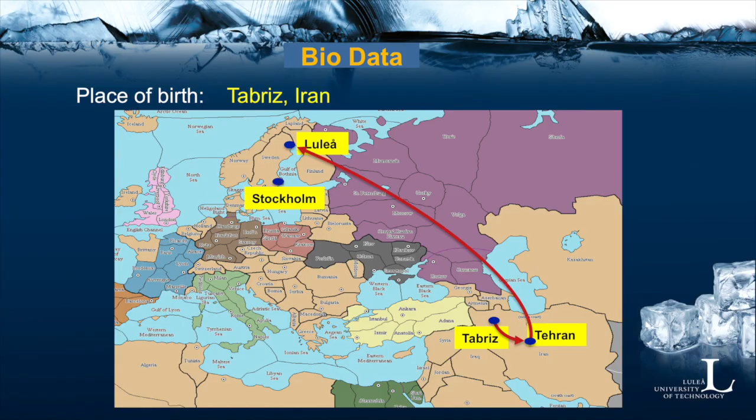Of course, I'm male. I'm married. My wife, Saide, she's present here, and she's a teacher in the Luleå schools. I have one son, Shayan, 23 years old. He is a student at Umeå University. And I have one daughter, close to 13 years old, and she is in Porsöskolan. You can see all of us in this picture. This is from the hat ceremony this year, the latest picture we have. My wife, Saide, my son, and his roommate, and this is my daughter, Shania.

About my academic qualifications, I am now in the position of professor, holding that position since January 2018. Before that, I was associate professor from 2011. Before that, I went to Toronto and did my postdoc at the University of Toronto for 2 years after my PhD, which I got in 2005. I have a master's degree from the University of Tehran Faculty of Engineering, which I got in 1993.

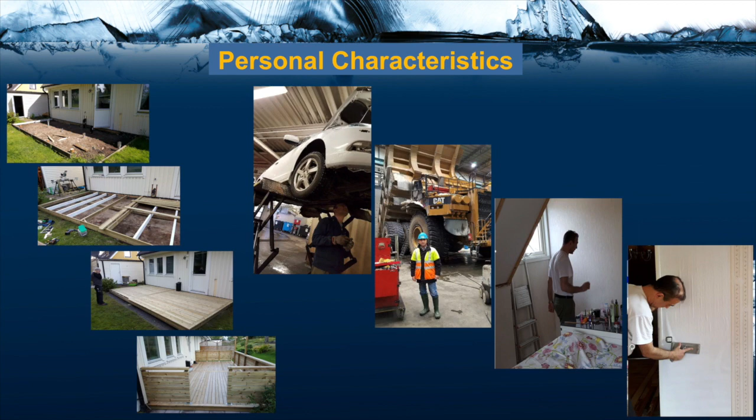Here I'm doing some repair and service on my own car. Whenever we go for a field visit, my first choice at any opportunity is to go to the workshop and see what people are doing there, in the mining area. And also, as you see, fixing things at home.

Here I'm changing wallpaper and building one new room in my house.

As for my personal characteristics, I'm a social and easygoing person - it's not only my claim, my friends also say this. I always think positively, I'm an optimist, because being pessimistic only causes suffering, while being optimistic gives you positive energy to go ahead and move further. I also enjoy helping people and making them happy.

Even if you ask my friends, hopefully they will confirm that I am a helpful man. I'm helping them. I don't like lying and I hate it. I believe in being simple and transparent. As they say, walk the talk. I'm trying to do this, I'm walking the talk.

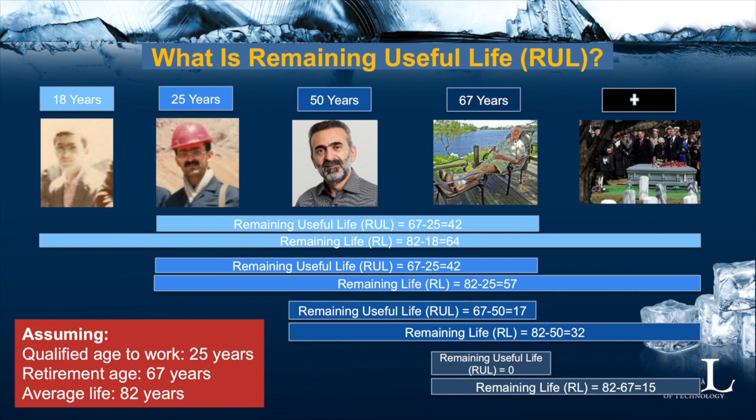When I get retired, my remaining useful life becomes 0, but I still have some life left - this is the scrap value. When one of your machines is getting old and you're not able to use it, or it's failing very frequently, you can scrap it, but you will still get some money for your machine when you scrap it. That's the remaining life, but the useful life is 0.

I don't look back at where I started. Now I estimate my remaining useful life from this time, this second. But sometimes the remaining useful life is less.

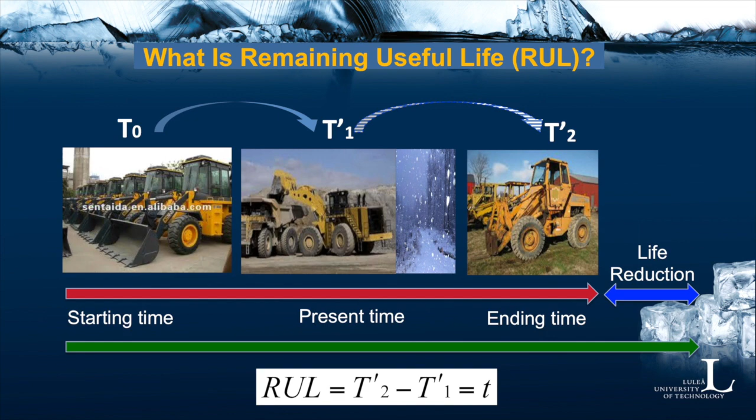Remaining useful life is now different than the previous case, which had no external factor. Remaining useful life is a random variable. It says how long my system is going to survive from now. It is a function of time and some other factor, an external factor, as I said.

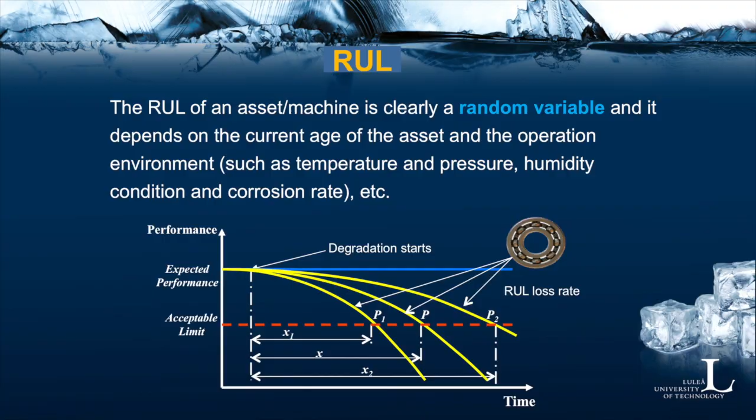But if I lubricate it, take care of the ball bearing and service it on time, I can prolong its life this much, meaning my remaining useful life will increase. The middle curve is normal. The left one is when there's a harsh condition. The right one is when I'm taking care, servicing, lubricating the ball bearing, which prolongs the remaining useful life.

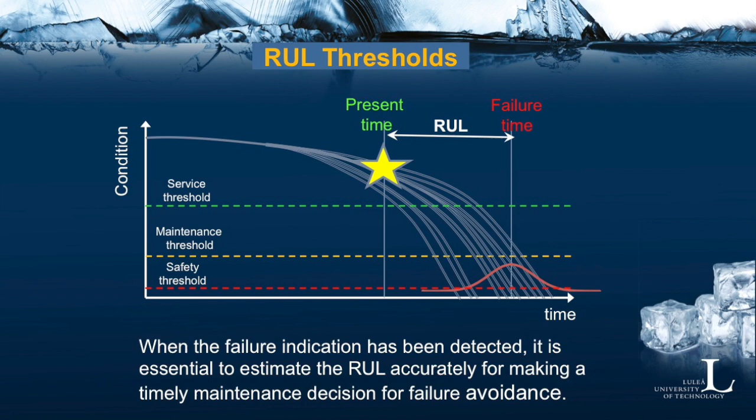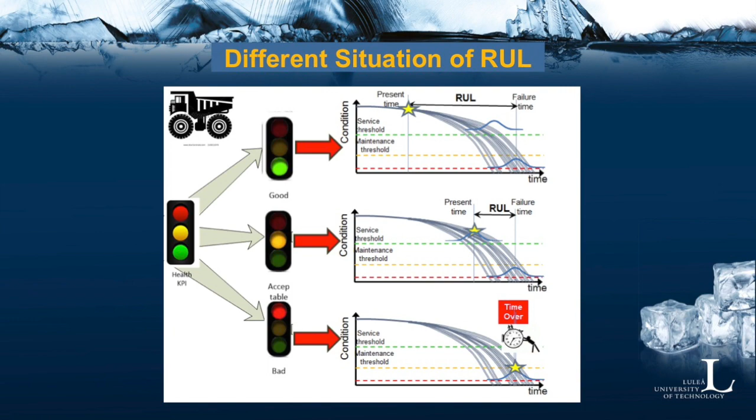If I don't do that, I will reach this level, where my machine will fail, and this is the catastrophe. I can define three levels of survival of the machine. As long as I'm above this line, everything is under control, my light is green. When I reach the maintenance threshold, the light is yellow, giving me a warning, and I have to take action. When I reach the safety level, I am not able to use this machine anymore because I've got a failure or it's dangerous to use it.

Now, how can we estimate remaining useful life? Commonly, in general, it's estimated by the reliability function. What's reliability? Reliability is the probability that this machine or system can survive, can work, can do its defined work under given conditions for a specific point of time. As long as I'm here, my system has worked this long, I'm happy, but I want to estimate when my system is going to fail, when I'm going to get problems.

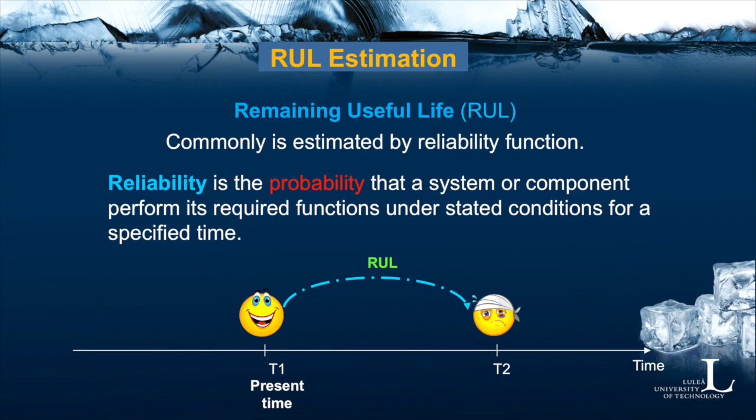This failure time can be here or can be here, it's very random, but it gets affected by different factors. If I calculate remaining useful life by reliability, I know reliability is calculated by the hazard rate. Failure rate is a measure of reliability, it's the number of failures in unit time. That's why if I have bad conditions, my machine will get failed very frequently.

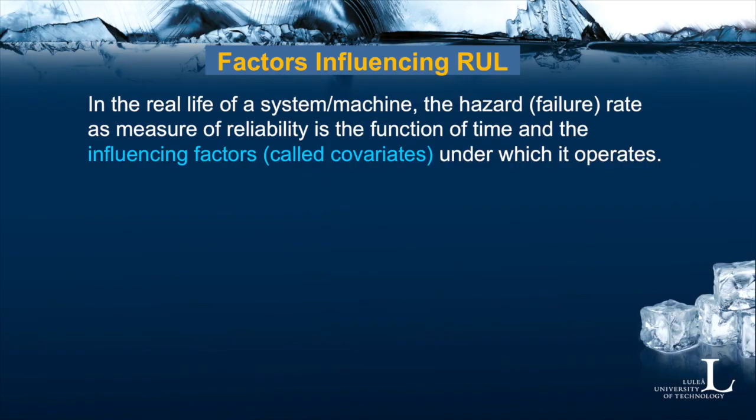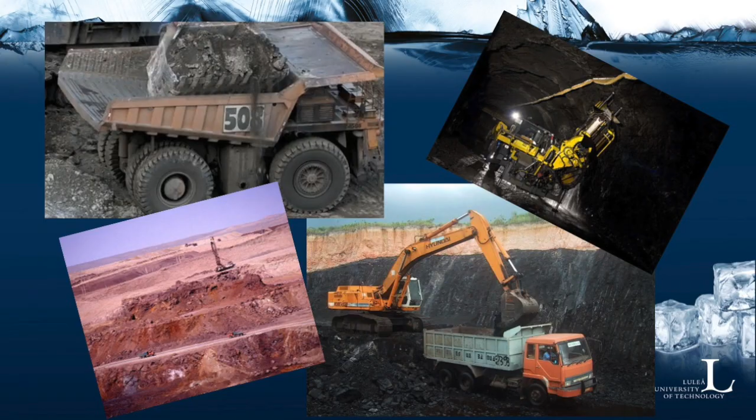I want to give you some example about how this covariate affects your remaining useful life. This example is from the mining industry. You know, mining is a really big industry, huge scale, and we have large scale, complicated machinery which is used in mining. And this is some example for loading, for hauling, for drilling, and so on.

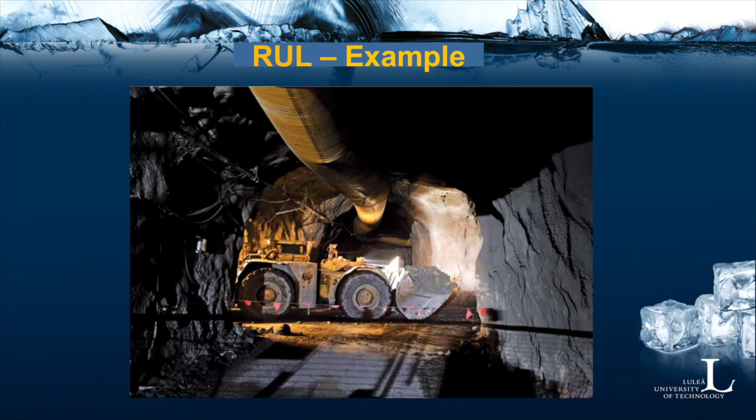As I said, this is a harsh environment. We have a lot of factors which affect the function and the reliability of the machine. The case study which we have done, I'm going to talk about, is about the LHD, load haul dump machine, which is the big loader which is used in the underground mine. One component of this LHD is a hydraulic jack. My case study was on the hydraulic jack of this machine.

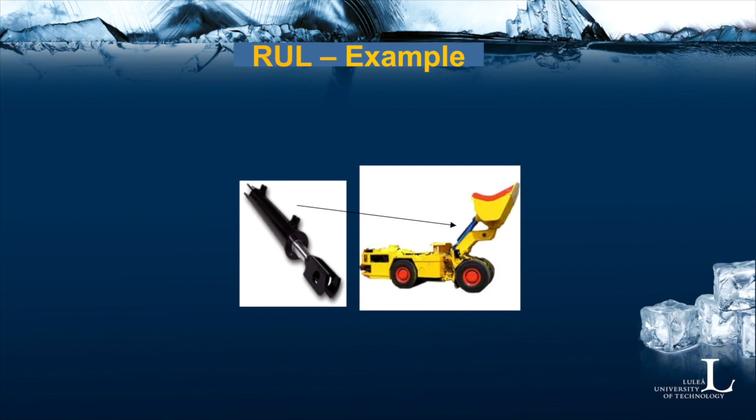I want to see how environmental factors will affect the failure of this hydraulic jack, and how can I estimate the remaining useful life of this hydraulic jack. When I was in the mine, I talked to some experts in mining. We found these 5 factors are important factors which affect my failure rate: the operator skill, maintenance crew skill, hydraulic oil quality, whether it is the manufacturer recommended or not, hydraulic system temperature, and

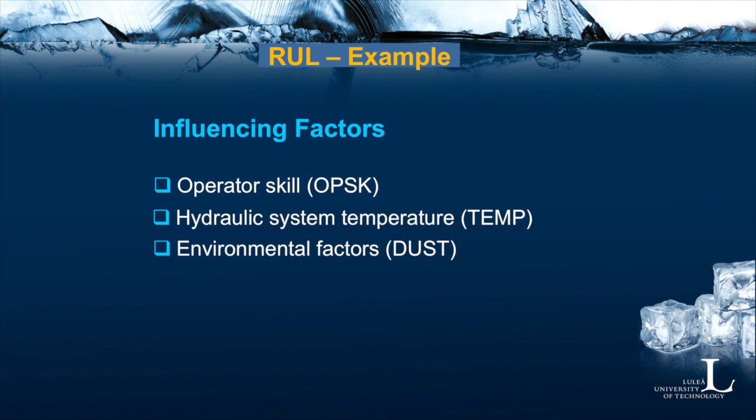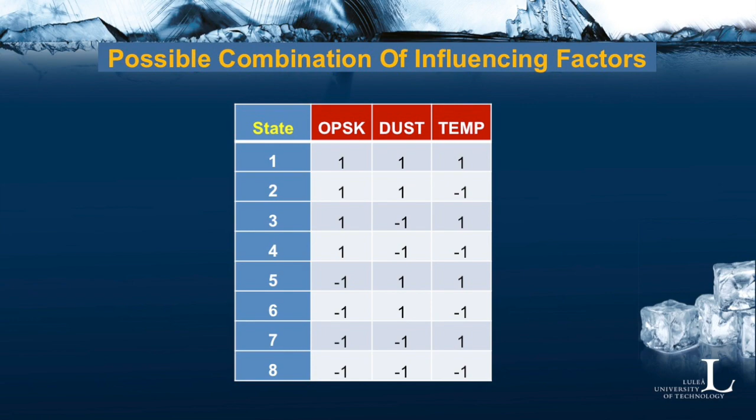These 3 factors can be combined in 8 formats. Either all of them are positive. What does it mean by positive? They are in good condition. My operator is fully skilled, I don't have any dust in the working environment, and temperature is normal, not high and not low. That's why I codified this state with the code of 1. When all covariates are in bad condition, with negative effect, I have codified with -1. The combination of these 3 factors, as I said, can be in one of these 8 situations.

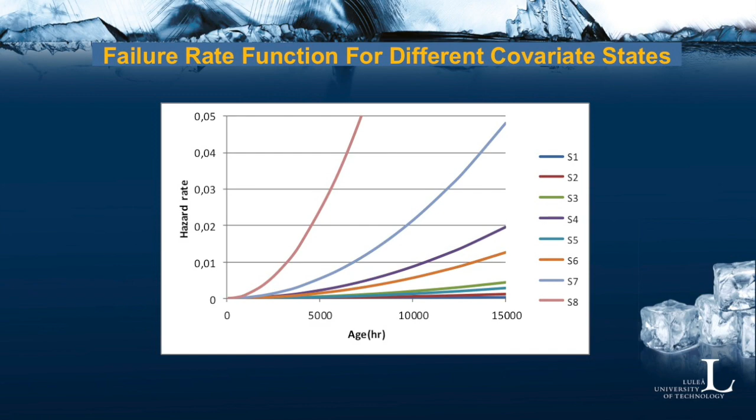If I calculate the hazard rate, I see in the worst case, when the 3 covariates have negative effect, the hazard rate is increasing exponentially. But when all are in good condition, positive, it's not increasing that much, it's almost constant. And in the cases in between these 2, you can see how it works.

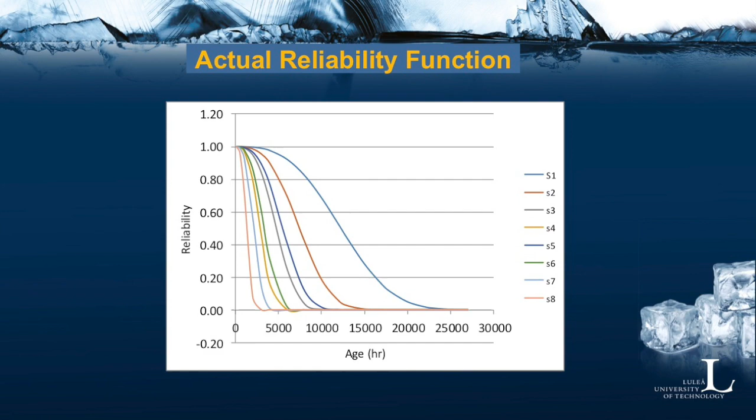And this is the reliability. As you see, reliability is decreasing very smoothly, very slowly when I have a good condition, when all covariates have positive, not negative, effect on my failure rate. And here, when all covariates are negative, you see how it sharply decreases.

And it shows the conditional reliability. It means my system has already worked for 2,000 hours. I want to know how reliable it is for the next 2,000 hours, which is up to 4,000. It tells me in the good condition, I have 98% reliability in the next 2,000 hours. My system has worked already for 2,000 hours; I'm now at 2,000. Next 2,000 hours, my reliability will be 98%. But in the bad condition situation, when all covariates are negative, it's almost zero.

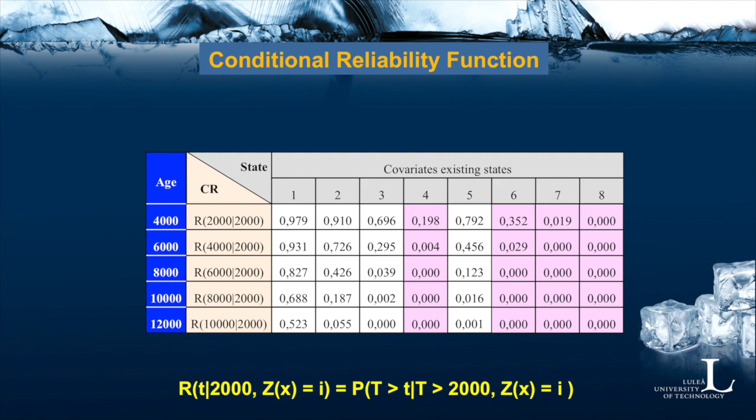And also, when the age increases, now I have worked for 2,000, for the next 4,000, 6,000 hours, what's my reliability? It's just 82%. See, as the age of the system is increasing, and also covariates getting worse, my reliability is decreasing. This is the reliability function, how it looks. In the good condition, see how it decreases, and in the bad condition, very sharply.

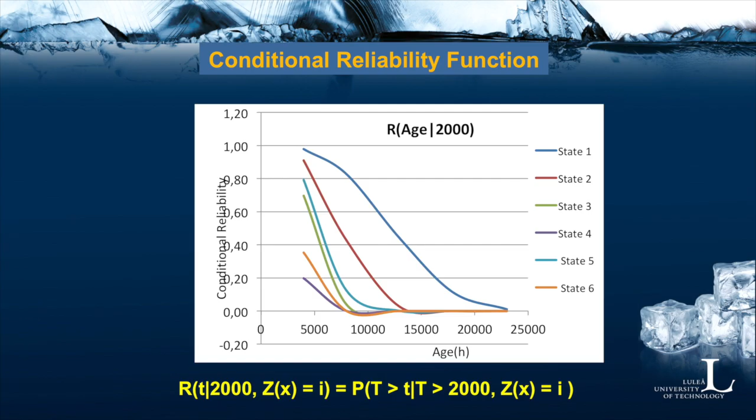Okay, that was my second part, and the third part of my presentation is about the future direction, what I am planning to do. This is just an overall picture based on my background, based on the knowledge I have got so far from the mining side, from the reliability and the machine side.

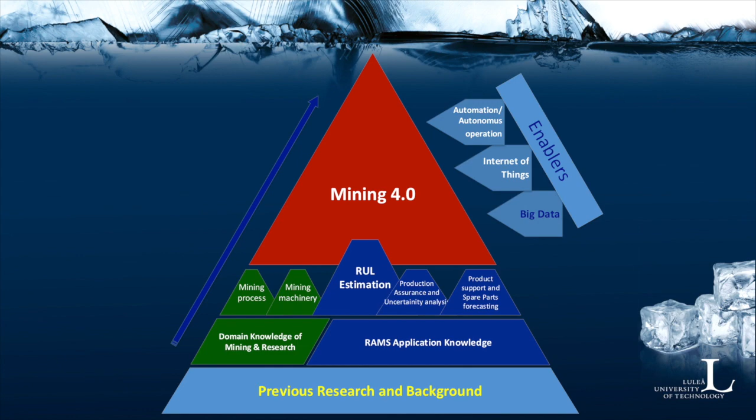The research I have done is about the mining process, about the remaining useful life, about the product support and so on. I'm trying to get the help of these enablers, new technology, new techniques, to reach the application of Industry 4 in mining, which I call Mining 4.

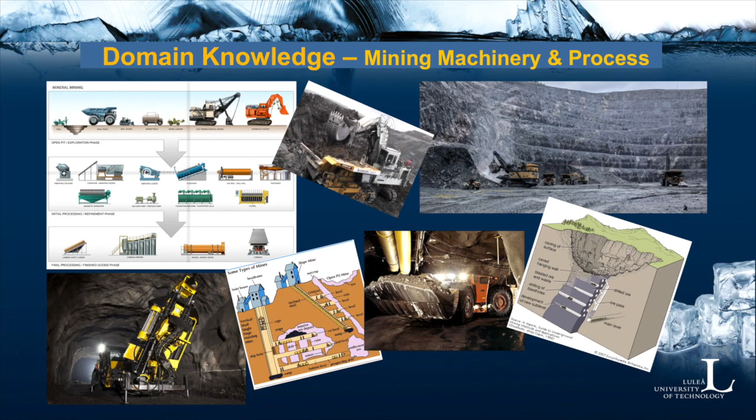As I said, I have the knowledge, experience and a little bit of background about the mining process. I know how mining works. I know the process. I know the machinery. And this helps me to understand the situation or condition very well.

And I have experience with production assurance. What does production assurance mean? I want to see in this research how capable my system, my machine is to deliver, to fulfill the demands, of course by considering the reliability of this machine.

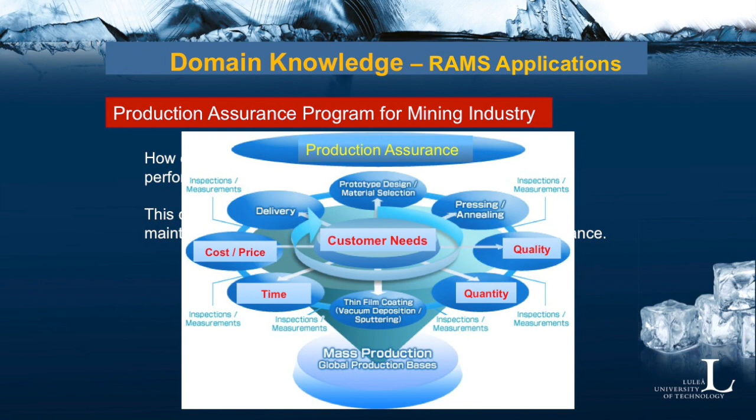If I know the customer needs from the quantity, quality, and cost point of view, and if I know the time limit, then I can make my machinery, my system, and process ready to deliver the demands on time, or assure my production.

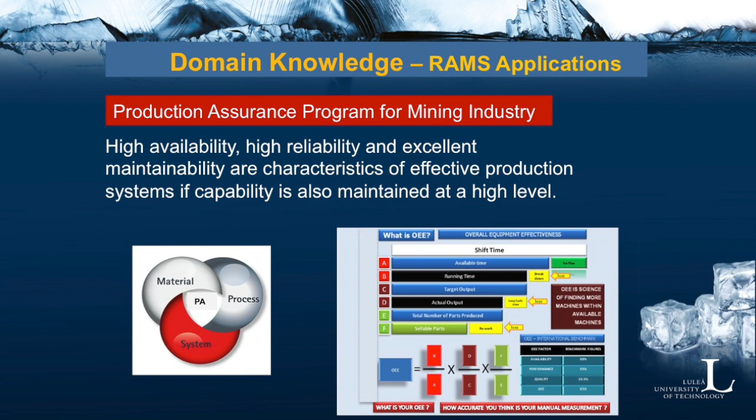Of course, this production assurance is a function of reliability. Reliability affects your production assurance because your system should work. I'm looking at production assurance from the machinery point of view. When my machine is reliable, working a long time, available for a long time, then I'm able to use it to produce the product.

One of the parameters which limits me in availability is product support, the spare parts: how long I have to wait to get the spare parts. And this is logistics. I know about logistics. I have done some research, that's why I have knowledge about this also. It will help me to go further.

I estimated the spare parts in my PhD period by considering the criticality of the spare parts, the system availability, maintenance scheduling, maintenance planning, and also the inventory problem, management of the inventory.

How many spare parts I have to keep in my inventory. Whenever I need one, I should not face any shortage. But I cannot keep too many spare parts in the inventory because it's blocking money.

Okay, knowing all these things, I'm going to talk about estimating the remaining useful life. And based on remaining useful life, I'm going to see how I can use new technology to estimate it in a correct and very accurate way. We use remaining useful life in our lives, but maybe we don't know the name of the concept we are using.

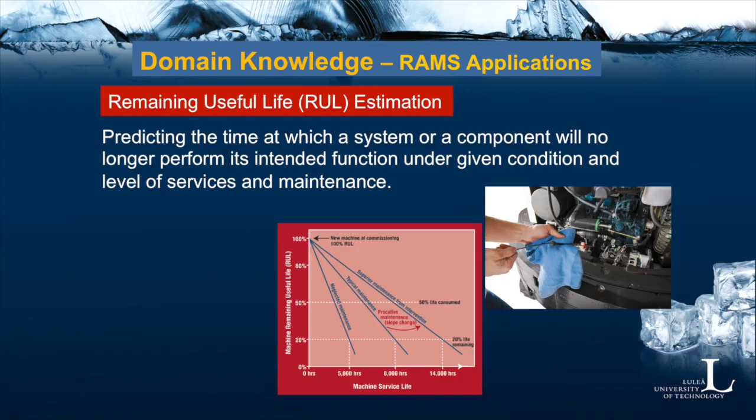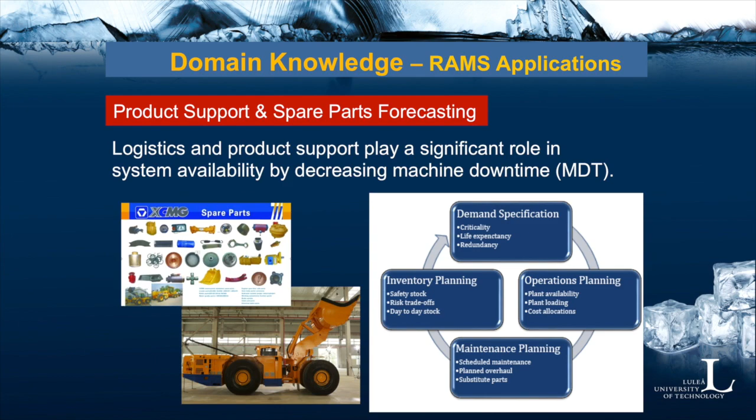In the new world, to analyze the condition of the machine, a lot of sensors have been put in the machines. New machines have a lot of sensors. We are getting a lot of data every second, every millisecond maybe, with different formats, at different velocity, with different volume. And it makes me face big data.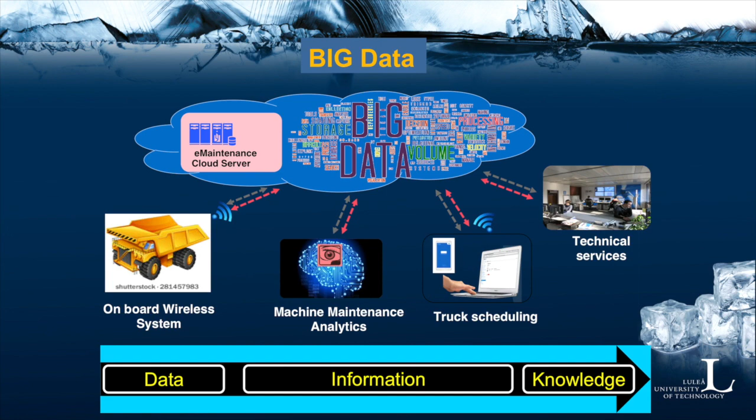Big data is not the size of the data, it's the volume of the data, the veracity of the data, the validity of data; big data has different concepts. And I'm facing this concept these days with the new machinery. And I don't know how to deal with this much data. What I'm planning to do is transfer this data to information and get some knowledge from this data to be able to make decisions about my machine.

Nowadays, every industry talks about automation and autonomous. In autonomous operation, it means machines are working by themselves. That's why in a fleet, in one environment, let's say, different machines are working. They are instrumented with sensors, measuring different parameters. But they should be interconnected. Machine should talk to machine.

In autonomous mining, let's say, when one truck is coming from one tunnel and another from another tunnel, there is no operator. They should interconnect. They should communicate with each other, stop, then recognize which one has priority to go. Priority is with the truck carrying the ore. Okay, this truck will go, and the other truck, which is empty, will go later on. This is interconnected. And the trucks should be intelligent, as I said. When they stop, they should make a decision about which one should go first.

That's why we use the industrial internet, or Internet of Things, in which all machines working in one environment are connected to each other. As we see here in mining, let's say the hauling system with the drilling system, with the loading system, and so on. All should be connected and communicate. If it is done, then we reach autonomous operation. Autonomous operation means operation without an operator, not automation. Automation is different from autonomous.

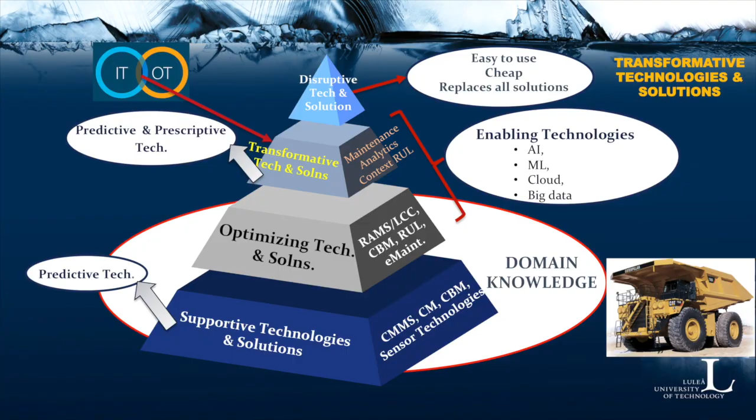I have to break something. I have to break some rules and come up with a new idea, with new findings. And all these things are planned to be in digital format, digitalization, which helps me get to my planned goal in future.

Yesterday I was looking on the internet, and I saw that even Rio Tinto is thinking exactly like us, or we are thinking like them. They also see the mine of the future. They think about big data analytics, automation, smart people, smart operation and so on. Thank you.

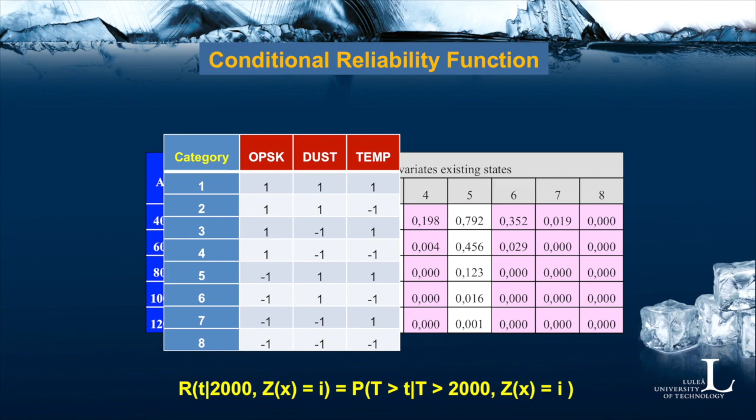For example, for dust, we can measure the number of particles per cubic centimeter. We can put the exact value of these measured parameters in the calculation. But here, for simplicity, I have codified it +1, -1. Exactly, that was my question. Why only 2 levels? So you already explained that.

And if this is similar to factorial design, how do you assure that the experiments are independent? Do you have problems with IID residuals? In the data collection, we first test our data for the IID assumption, then we use it. Thank you.